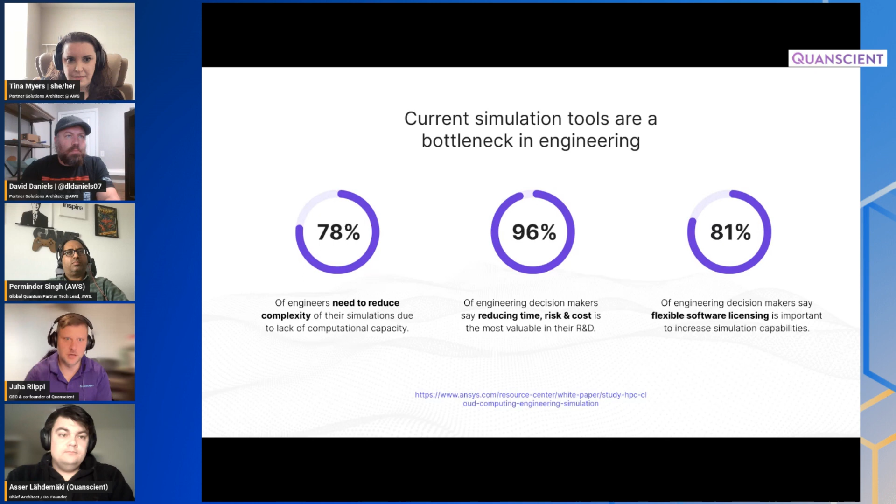A big part of the engineering decision makers say that the current traditional licensing model of this software is also a problem. They need more flexible software licensing, things like B2B SaaS. That's the reason why we built Allsolve.

It's right now out there. We've demonstrated well over 100 times speedups in our simulations already, just with the cloud technology, which means engineers no longer need to reduce the complexity, and their runtime just drops dramatically. We have cases of simulation time dropping from 8 days to 1.5 hours, or from 3 weeks to 8 hours, while getting 3 times more accurate results - meaning the design iteration cycles of our customers are dramatically faster, and they can rely on the simulation data, plus enabling automated workflows.

With cloud-based APIs and programmatic access, engineers won't necessarily need to rely on external simulation software anymore. Instead, it could be directly integrated into the CAD software they use to design, which could automatically trigger hundreds of simulations, kind of like DevOps and automatic testing in software. All that simulation data can be hooked up to machine learning algorithms to provide optimization tips for engineers, or create surrogate models of the designs, building this kind of platform and enabling more experiments in less time.

Last but not least, the quantum part, which has the potential to provide exponential speedups. The aerospace industry is one place where simulations are used a lot. With current traditional computing technology, it's practically impossible to compute the aerodynamics of an airplane accurately. You need to build a prototype, take it to a wind tunnel, test it, and iterate on that, and that process takes years. But with quantum, you could actually do it accurately with exponential speedups, and that would be revolutionary for the aeronautics industry. That's the reason why we built Allsolve.

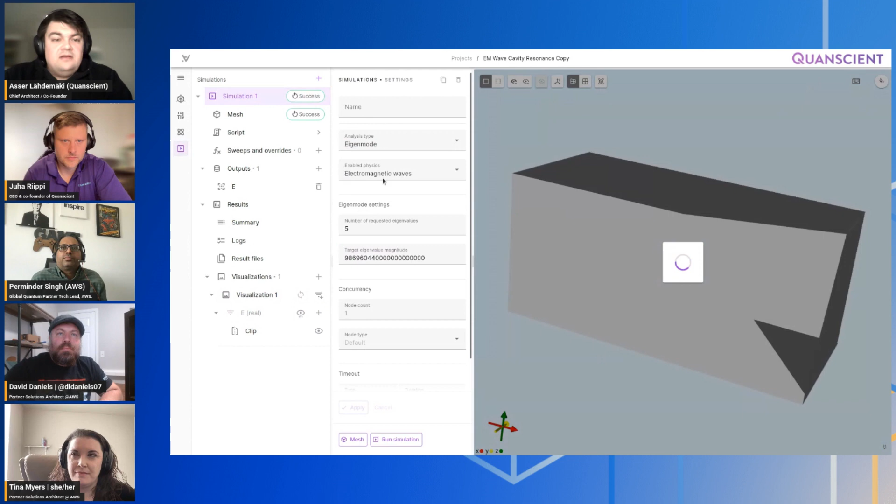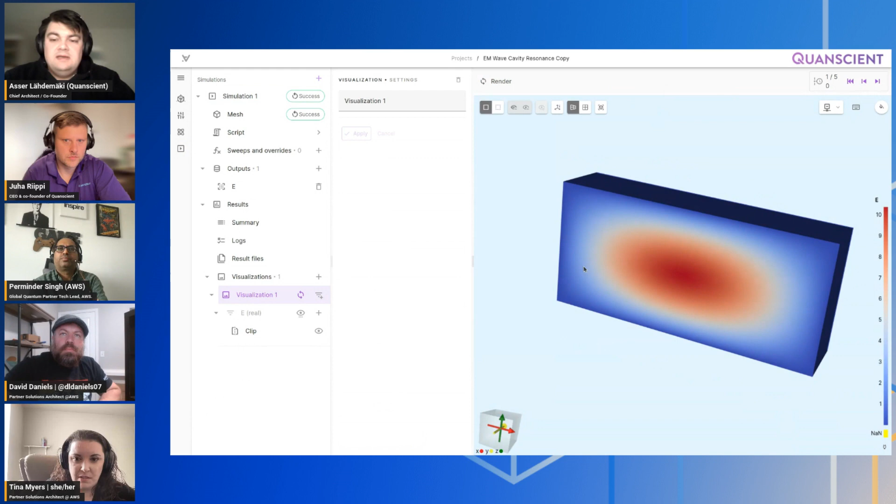So this is the electromagnetic wave cavity resonance, and we've done an eigenmode analysis, which means there are certain modes that an electromagnetic wave can resonate in for some geometry. What this simulation finds out is the modes in which the waves can resonate there, and you can visualize the modes.

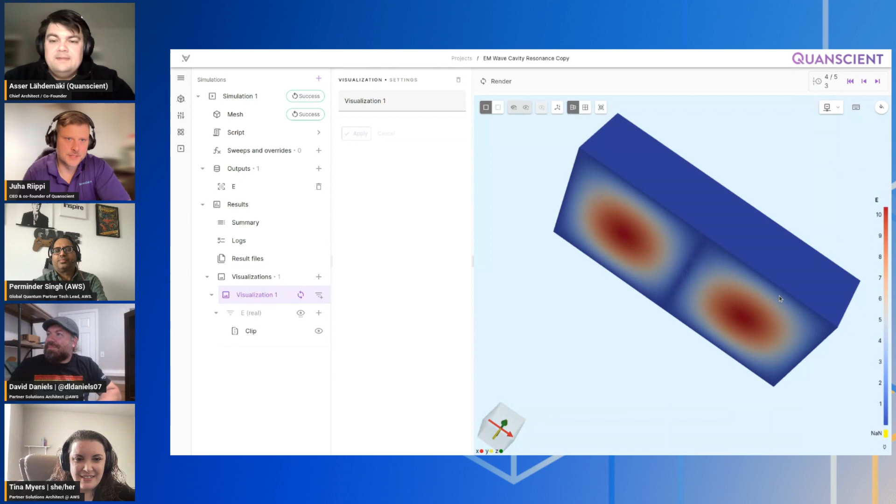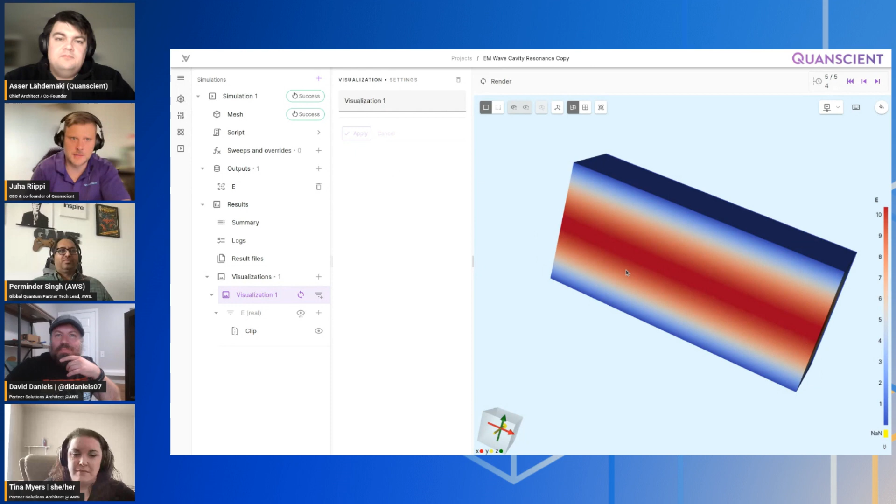It might not make much sense to you if you don't know much about electromagnetic waves, but basically resonance modes and eigenmodes are an important thing to discover in the design phase, because if your materials have similar resonance frequencies, that can start causing problems. It's similar to the example about bridges collapsing when wind blows at a certain speed and hits the resonance frequency - it accelerates and the structure collapses. So it's basically the same effect.

Sure, yeah. Basically in this case it's a desired resonance. So desired in electromagnetic waves, it's often desired because that's basically how we do any kind of radio communication.

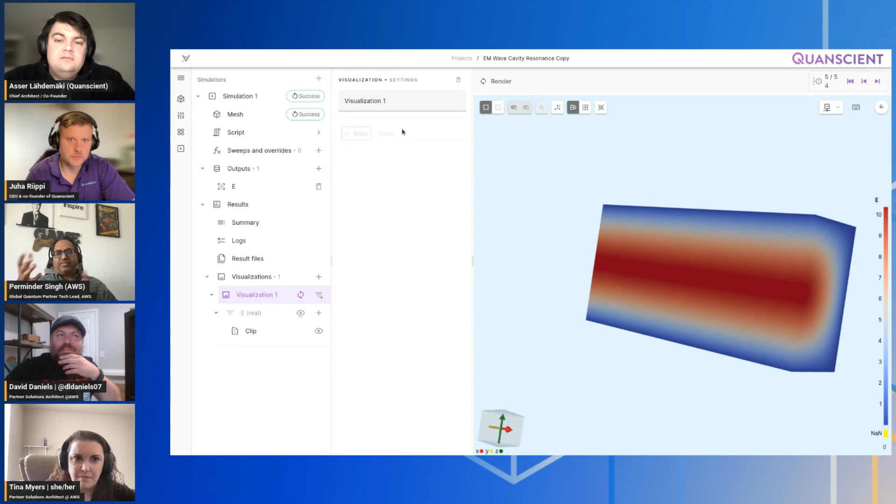Okay, yeah. Maybe we can also look at basically checking the tensile strength of the material, right? Like how much frequency it can take and all. Is it like that? Okay.

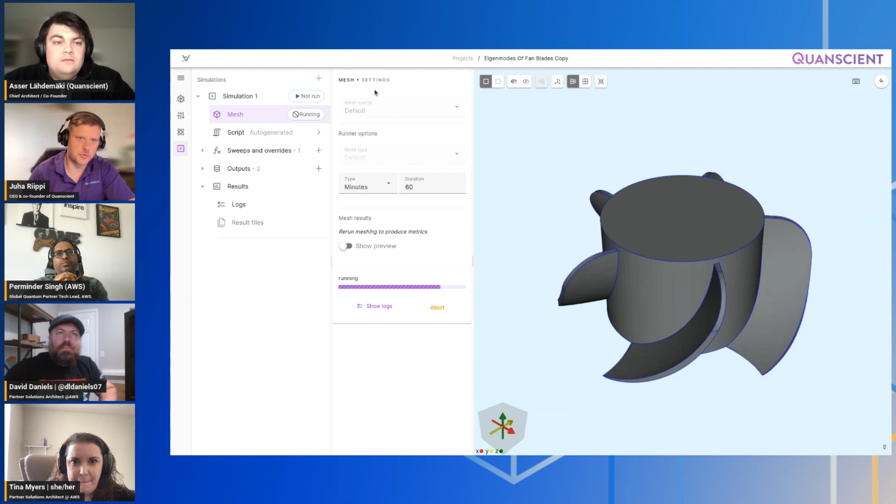Yes, that's possible. We have, for example, these eigenmodes of fan blades. Can make a quick run on that. Maybe you can actually, while it's running, also show how it's set up—where you can import your STEP files, where the geometry is defined, and then what kind of physics you can add to the problem.

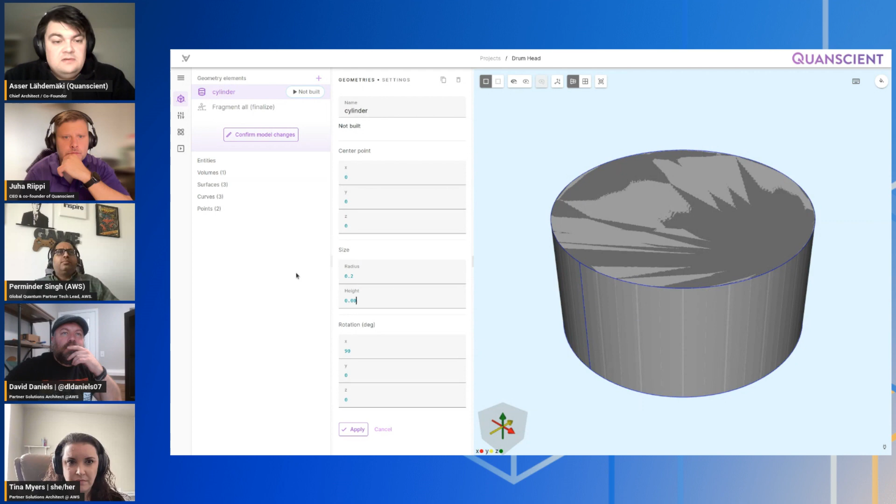Yeah, I was thinking about making something simple, so let's make a drum head simulation. You could start with a geometry file, but I'll just make a simple cylinder, which will be our drum head. Let's say it's 20 centimeters radius and 2 millimeters thick. Don't know if that makes a good drum head, but let's see.

And for the material, we can just pick one of these ready-made ones. Let's say it's made of aluminium. Nice, I was about to ask this question—where do you pick the titanium versus the fiber carbon, all that?

Okay, yeah, and you can of course also fine-tune a lot about the material properties, so you can pretty much do anything—all the physical properties that are relevant. You can also make it anisotropic, meaning it can be different in different directions, and other complex things like this.

But yeah, basically we have this tab model here where you have your geometry model. You can do some simple operations here: add basic shapes, do some translation, removal, copying of the objects, and then some Boolean operations on them.

And then you have the properties where you can define shared expressions, which are basically functions that take arguments, and you can use them in various places in your problem definition. Or they can just be constants or variables that you want to sweep over.

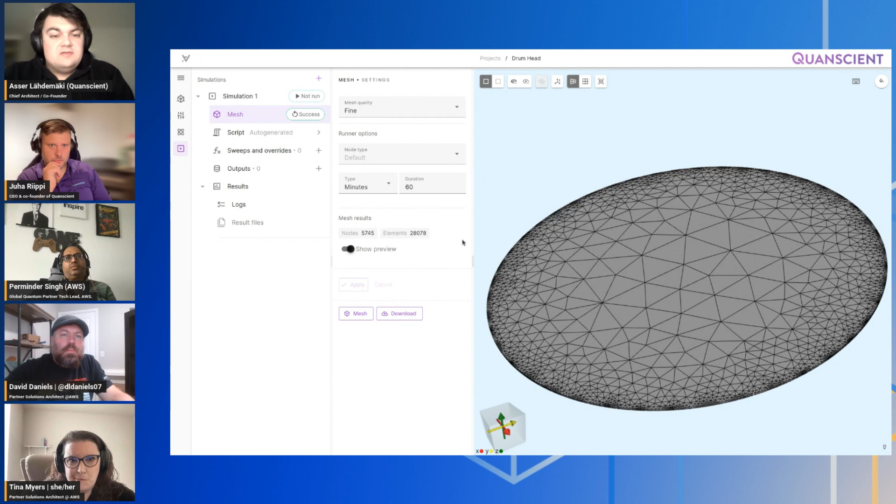And then we'll do an eigenmode analysis—the lowest 6, and the eigenvalue magnitude can be 0. And what is sort of special in Allsolve is that we are script based, and everything that you define in the graphical user interface is actually translated into this simulation script.

You automatically get all of your regions that you defined in the UI here, and you can use them in the script. And if you enable the scripting mode, you can add your own simulation formulations, completely customize it, or do whatever—that's all Python.

So as I said, the actual solver library is written in C++, but we have this Python wrapper for it, which is utilized here because C++ is a bit hardcore for many people these days. So yeah, then we define some outputs—the eigenvalues and the displacement field. Then we can run it.

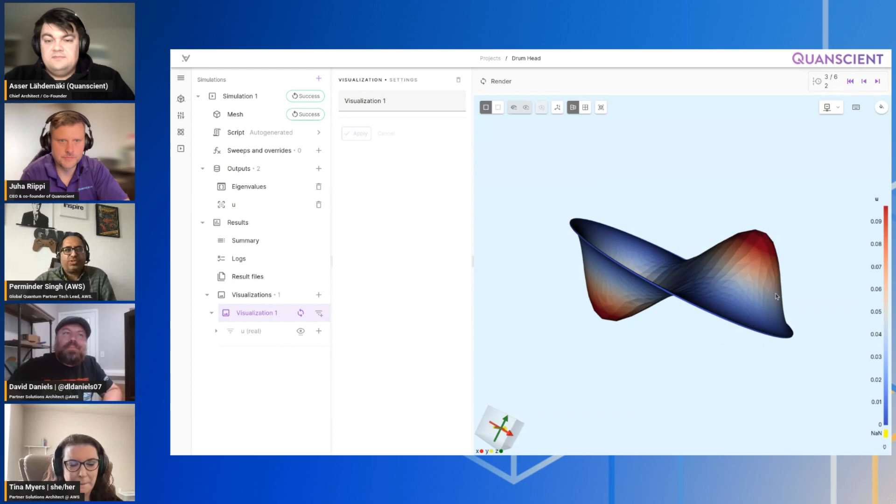And this eigenvalue, whatever we were calling it in the context settings here, is it the energy state? And what we're trying to do is get the lowest stable energy state for that particular material, because material is very stable at its lowest energy state. Is that the concept here?

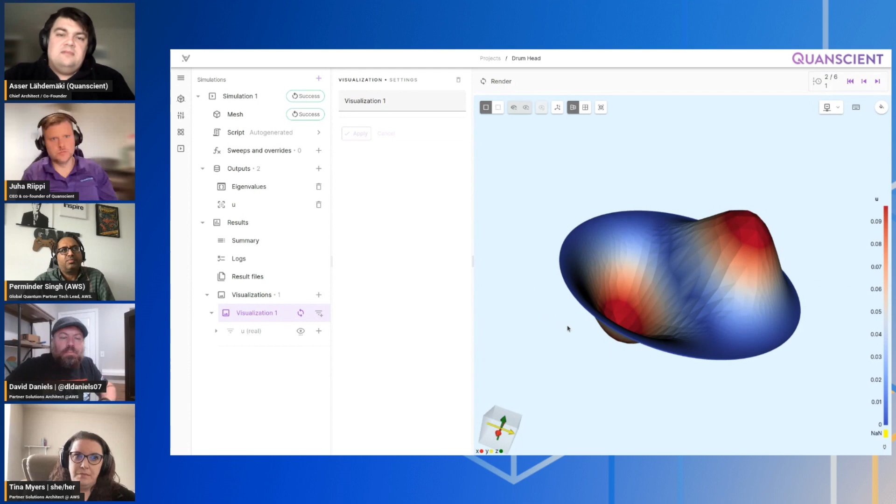I would say it's not about energy states in this case. The eigenvalues in this kind of simulation are pretty much the same as the resonance frequencies, which are also called eigenfrequencies. It's called eigenvalue just because it happens that the eigenvalue formulation gives you these resonance frequencies.

But we want this as blue as possible, right? Or is it? Well, in this case, no, we just want to see, for example, since it's attached to the drum body from the sides, we don't want that part to move, but we want to see how the drum head vibrates up and down.

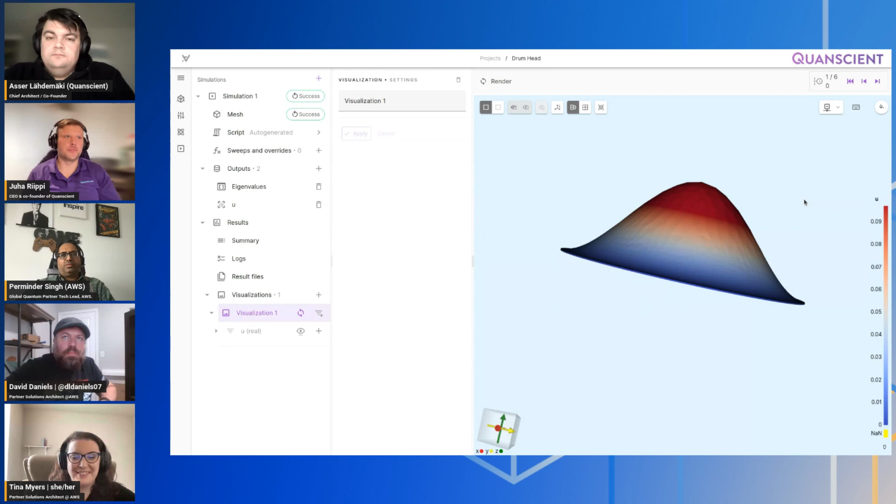So basically, let's say you're designing some mechanical system, and you want to know what the eigenfrequencies are, because it could be installed in a place with background noise, and you don't want that noise to match the eigenfrequency, because that will cause harmonic vibrations, which could mess up a sensitive device, even break it, or at least cause it to malfunction.

And then by iterating here, you could try various designs, for example clamping it differently or changing the geometry slightly, so you could manipulate the eigenfrequencies to avoid matching frequencies present in the environment where the device would normally be used.

So after finding these frequencies, you could pick one and do a so-called harmonic analysis. For that, you would put this thing into air so you could see, when it vibrates, what kind of sound wave or acoustic wave it sends out.

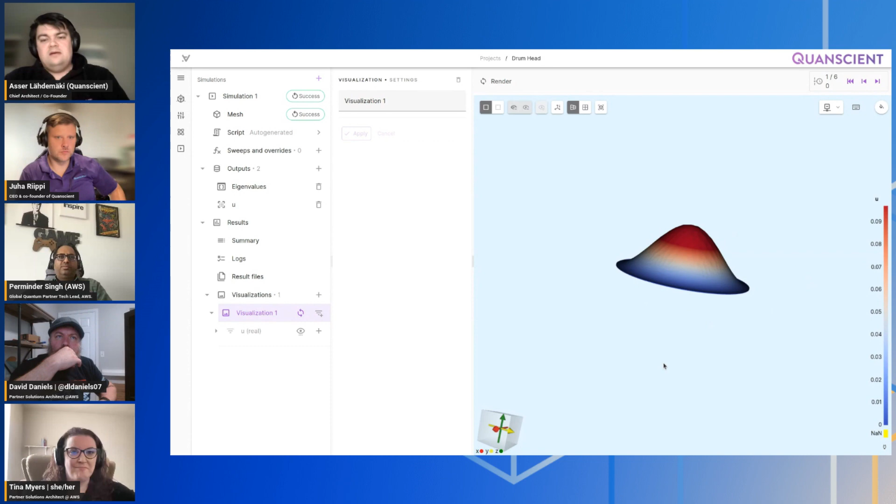You can also do that in this software. You have the acoustic wave physics, and then you can add this acoustic structure interaction, which will connect it to the solid mechanics. But I think for that we just need to draw an airbox around it, so the waves would have some material where they actually move.

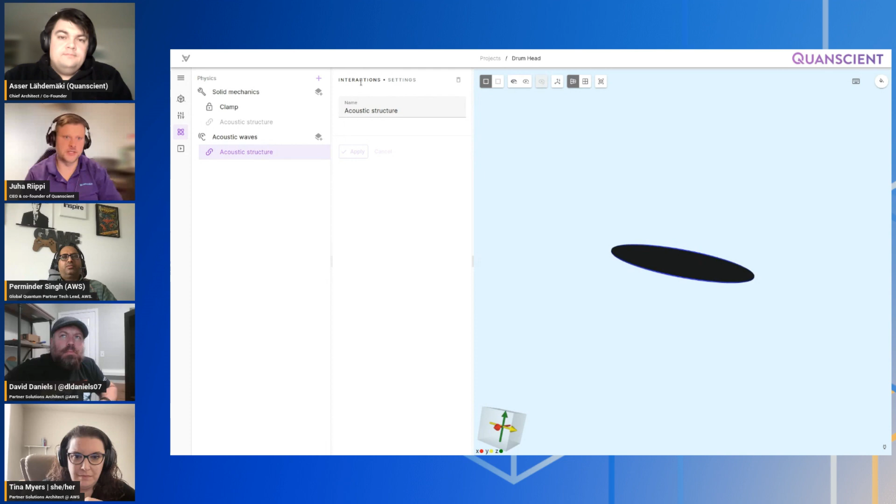And that's actually a big reason why there needs to be this kind of manual thing to add, because if you import your CAD design in there and want to simulate something acoustic, you want to add a box filled with air around that object, so there's a physical medium for the sound to travel. Here is an example of that.

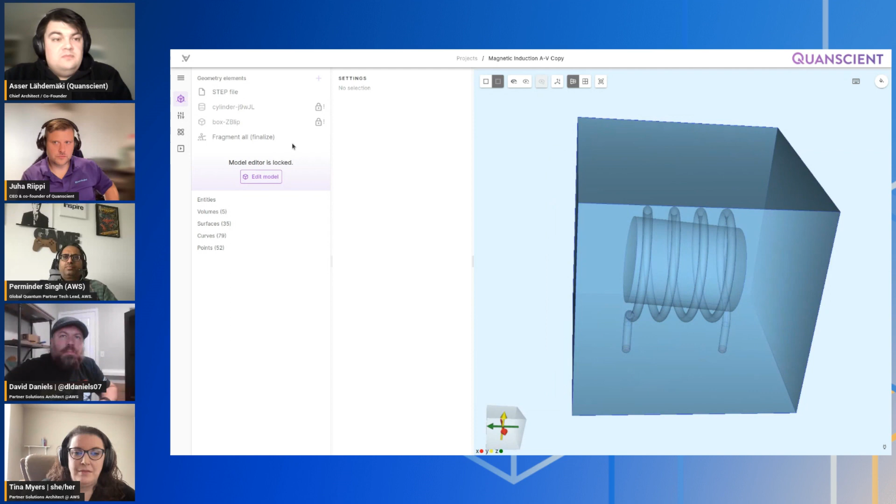In this case, we have taken this coil as a geometry file in step format, and then we put this box around it, which we then make air, and we have made the coil aluminium and have a steel core inside the coil.

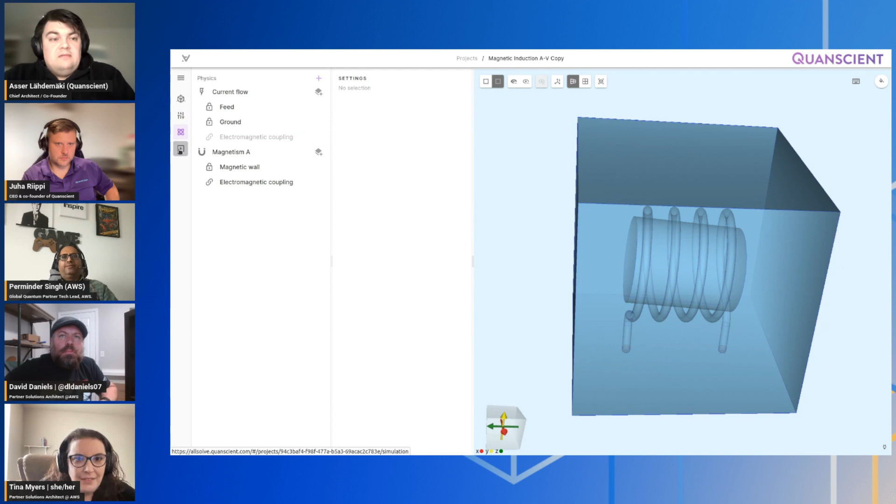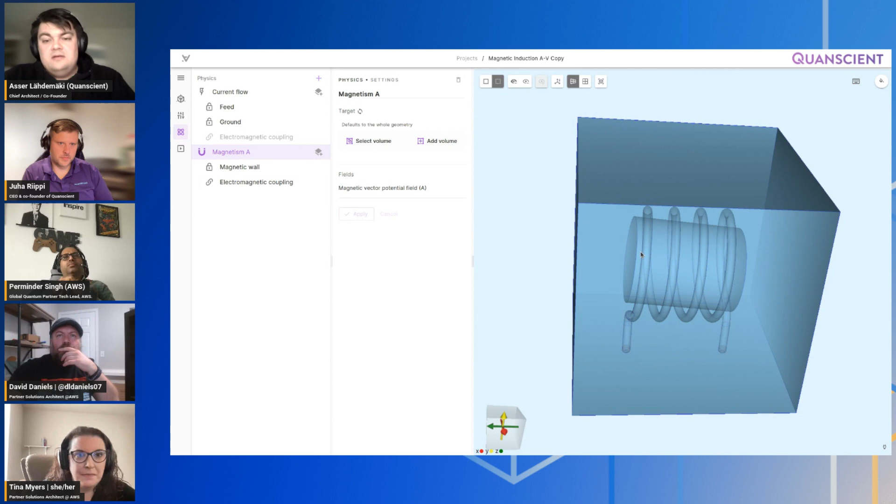In this case, we have made a simulation where we put an electrical current through the coil, and also simulate how it creates a magnetic field and then induces a current in this steel core. And the result looks something like this. You can actually see how the magnetic field lines would go - they are shown with these arrows.

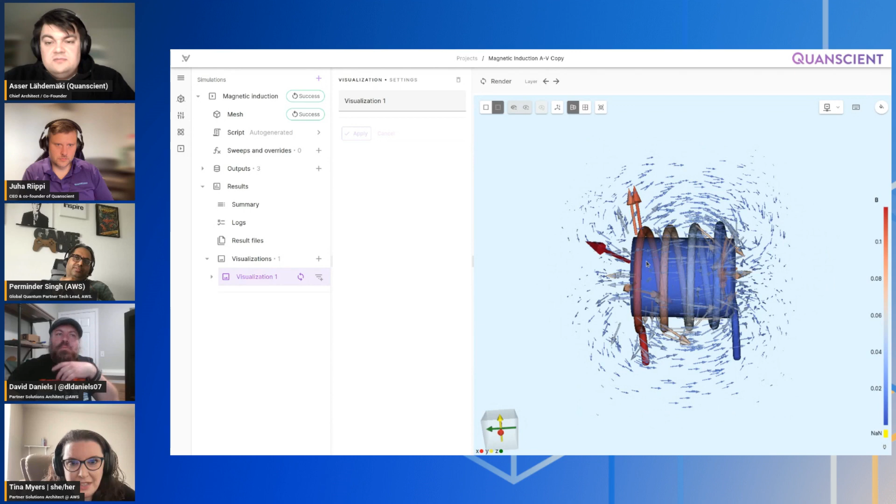And if anybody's just joining, we are talking today with Asser and Juha from Quanscient, and they are going over their Allsolve solution. Right now they're going through a demo showing us how we can speed up and improve the calculations in your multiphysics simulations.

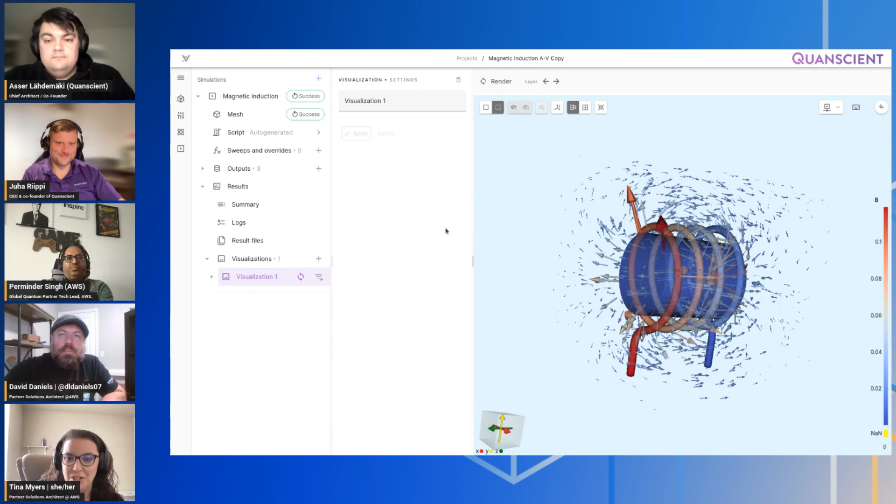That looks really cool. Yeah.

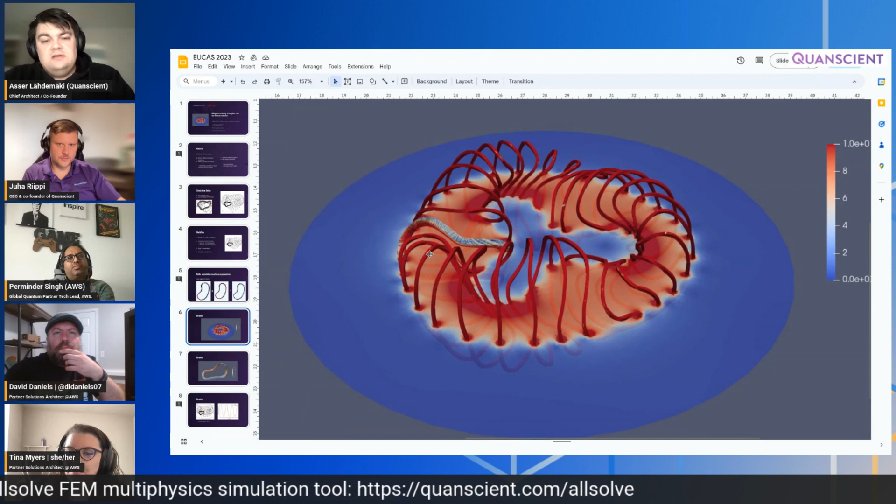When it comes to the big things we can solve, I don't have it ready here, but I do have an image from a presentation we did - we published a scientific paper at a physics conference, and what you see here is what's called a stellarator, a certain type of fusion reactor prototype. This was 320 million unknowns, distributed to 500 machines, and I don't think you could even solve it on fewer machines with that many unknowns, but it only took 15 minutes to solve.

Yeah, that's really an example of speed.

It's really an example of what used to be an impossible problem before Allsolve. You definitely could not do that before - typically the biggest simulations you can run in traditional software are maybe 5, 10, 20 million unknowns. This is 320 million, and it runs in 15 minutes.

This is a very complex and big problem, because all of these weirdly shaped coils are superconducting wires, which are highly nonlinear, and then you want to see how the magnetic field behaves inside this coil configuration, which then contains the hot plasma inside.

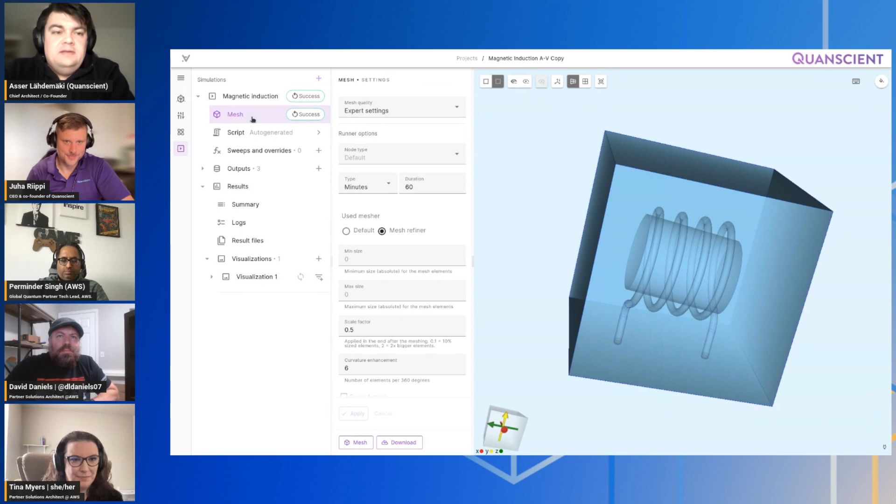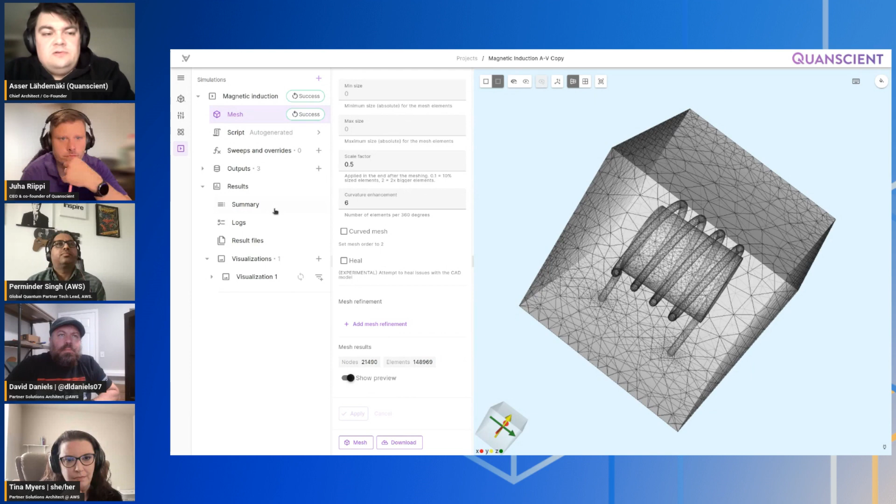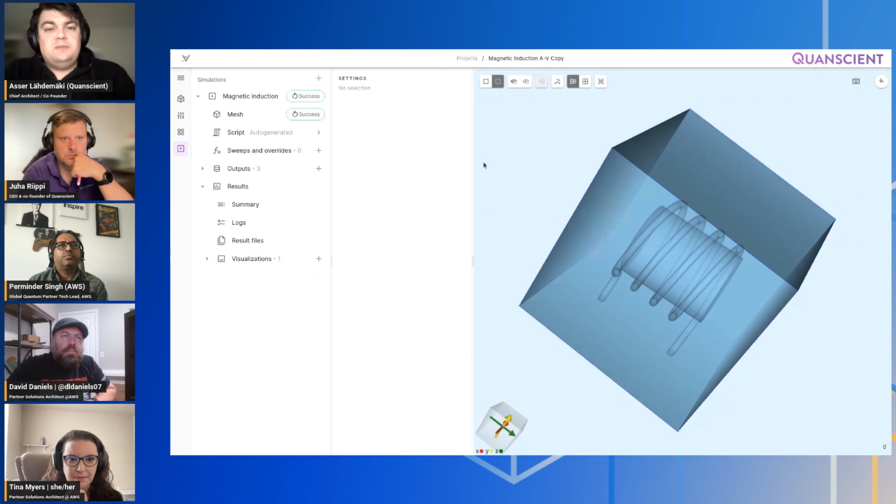It's all part of being an expert, but basically, as you saw, there was this meshing thing. It depends on how tight a mesh you make, so how much accuracy do you want. In this particular case you have 150,000 elements, and then there's also the physics setup that affects the number of unknowns you'll get. And in this case, there was 420,000 unknowns. But we don't have a solution to automatically determine this. It's a very complex problem, because you have to take the geometry in, then the physics definition, and somehow figure out from that how big this is going to be if you want this or that accuracy.

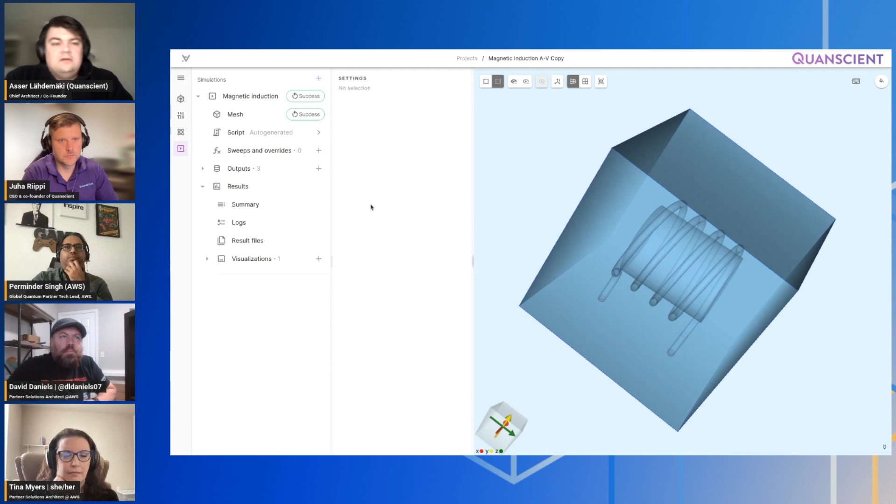But we are planning and working on a machine learning based solution where we identify certain features of the geometry and the problem definition, then collect data as we go, and try to teach the AI model to predict the number of unknowns. Then we can use that prediction to actually choose the amount of nodes and type of instances for the user.

Great. Cool. So yeah, let's now see the quantum demo. Impressive, we learned a thing or two today for sure. That's great, great to hear.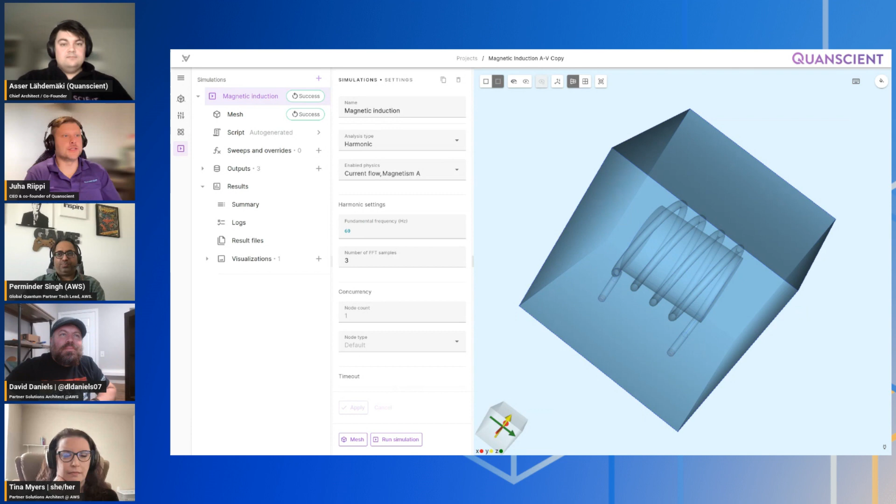All right, yeah, I can present the quantum demo in just a while. Just before moving there, a little background on the quantum research and the roadmap we have. The first step that basically every quantum company takes is validating if the problem they're solving can actually be solved with quantum, and that's typically done with quantum simulators - classical computers simulating quantum computers. We've done that.

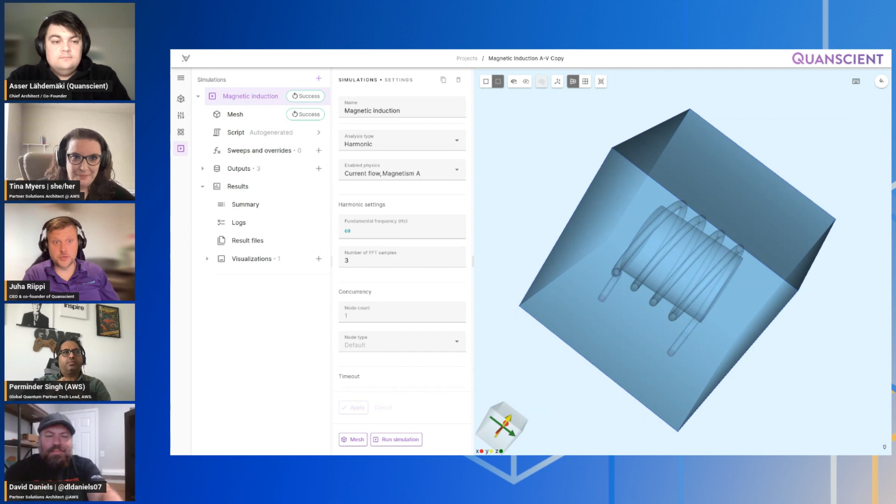But also in the summer of 2022, we had a breakthrough moment. We were able to run a physics problem using real quantum gate-based quantum computers with accurate results, and to our knowledge we were the first team in the world to achieve that. I believe we might still be the only ones, at least I haven't heard about others. People have been running these simulations with simulators, but not with real hardware, and that was due a lot to the optimization we were able to do for the algorithms.

Because right now, probably many of you know, we are in this NISQ era of quantum computing - noisy intermediate scale quantum computing. Noisy means they produce a lot of noise, qubits are very short-lived, not very stable, and produce a lot of errors in the computation. Intermediate scale means we don't have tons of qubits - I think IBM's biggest machines are at the moment about 500 qubits. But when dealing with the noise, you have to dedicate a lot of those qubits to noise reduction.

Many quantum experts say that quantum computers will truly be useful only in the fault tolerant phase, where we've actually come up with ways to deal with the noise. But we disagree a little bit on that based on the results we had.

So with that, I could show some of the stuff we've been doing. Just a moment, I'll have to actually... here we go. So some of the stuff we've been doing - this is our live quantum demo. You can actually register for it and play around with it. There's a couple of different algorithms presented here.

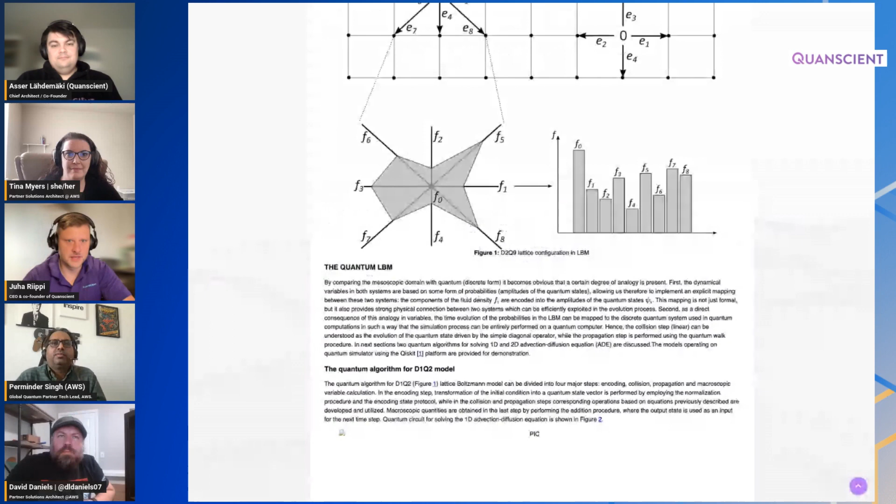And it's also very difficult to read out the results. But these can be neglected with lattice Boltzmann because it's sort of an evolutionary method where you can start with zero velocity field and let the system evolve in the quantum circuit. And we can actually also read out the results quite accurately. Then with a simple summation, we can get the accurate results that we need. But this lattice Boltzmann method has a lot of math if you're into that and the background on the method, so I invite the audience to go check that out.

If you're interested in that, I won't go too deep into it, and honestly I probably even couldn't - I'm not a math expert. But for some of the simulations that we've done, we have an example. This was the first simulation that we ran successfully with the quantum computer.

It's an advection diffusion effect simulation. What it basically simulates is, imagine if you drop some ink or some dense liquid into, for example, water - how it diffuses in the water. The first one was 1D, so basically the water was abstracted into a one-dimensional vector. This shows a 1D graph of how it diffuses, and it also compares it to analytical results from classical computing and how the quantum computer actually did.

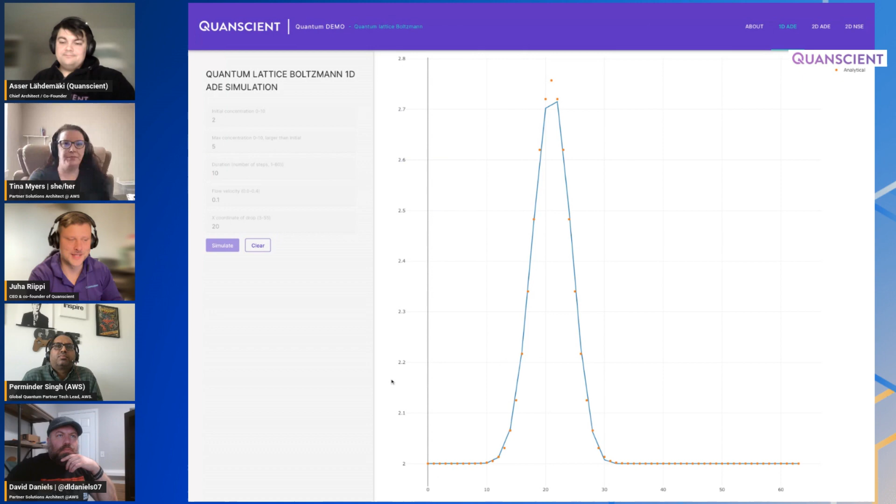Of course, when you're playing around with this demo, it's not running a real quantum computer in the background - this is using quantum simulators. It wouldn't be really practical because the runtime on real quantum computers is pretty expensive. There's also some data about the unoptimized quantum circuit. The optimized one is a little bit more hush-hush - we're not showing that around.

We also have the same task in 2D, and we were actually also able to run this using real quantum computers. There you could imagine that the liquid is a lake, and then you drop your ink here, and it shows how it diffuses based on time. So relatively simple tasks, which can be run in milliseconds with classical computers.

But the thing with the algorithms is that for the 1D problem, we needed 7 qubits. For the 2D problem, we needed 12 qubits. And the beauty of the algorithm is that with every qubit you add, we can double the size of the problem - so the problem size grows exponentially. But then again, the depth of the circuit, which is a big limiting factor because these circuits have a limited lifetime so it can't be too high, that grows logarithmically.

And that gives us the confidence that we can actually demonstrate quantum advantage in the next couple of years. Because to compute problems that are pushing the limits of what can be done with present-day supercomputers, with the Lattice-Boltzmann method, we only need about 60 to 80 qubits and about 800 CNOT gates. That's not an unrealistic number - the computers are almost starting to be there with sufficient noise reduction.

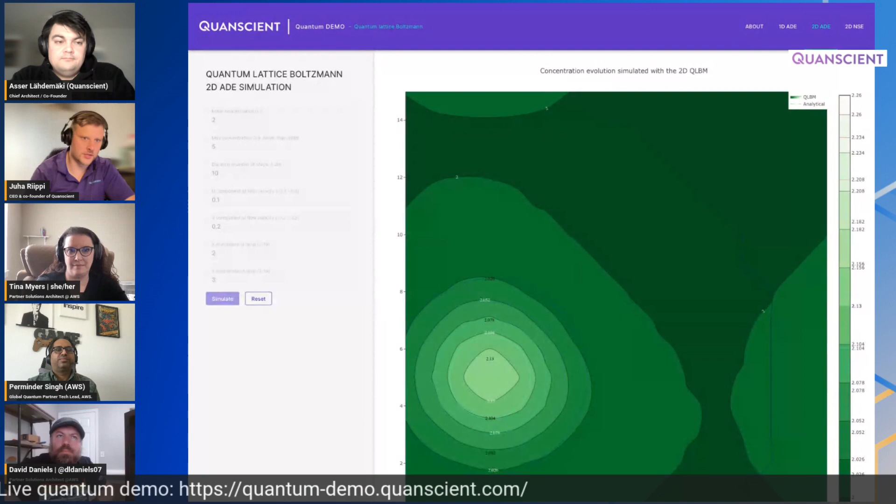Great, but yeah, that's sort of the quantum stuff in a nutshell. And of course, the steps where we want to go from quantum advantage - that's the point where we can start really solving relevant industry problems. And after that, basically start integrating the first quantum algorithms into our Allsolve product. So it will contain some of that stuff and the exponential speedups that our users can get.

Great, nice - I'm going to check on this demo link which you just showed, try it out myself. Absolutely.

And there is a question in chat - they're asking about what quantum backend you use, if it's something that you're willing to share.

We have experience with a lot. So yes, Braket, of course - but QPUs, the strategy has been that we want to be agnostic at this point. So we've been evaluating with a lot of different hardwares. We've been running with Rigettis, IonQs, IBM machines, Quantinuum machines, Atom computing.

And of course with varying results. The best results so far we have achieved with the Quantinuum machines and the IBM machines. Particularly Quantinuum's qubit topology is such that it kind of matches our algorithms extremely well, and that's where we got the best results out of at this time. Let's see how things develop in the future - it's a pretty interesting race between the hardware manufacturers.